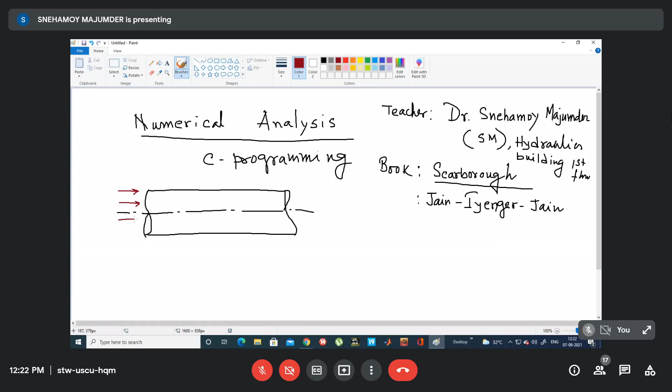Suppose this is the pipe, and this is the axis. We want to know what is the velocity at different points when a fluid, the red one shows a fluid, approaching to the tube and passing through the tube, and with respect to time it has changes in velocity, pressure and velocity profile.

So what happens, if you analyze it, though it is not something you can understand properly right now, but the things are something like this. These are the core boundary layer. You will be studying this in detail. And after the fully developed condition arises, the flow velocity becomes something like this.

Here you can find the flow velocity becomes something like this. Then it is constant. So here it is parabolic up to this point, and this one is constant. And as we approach, this length decreases and it becomes fully developed.

So this is experimentally verified, which means we will get this velocity profile if we have a probe and make a hole here,

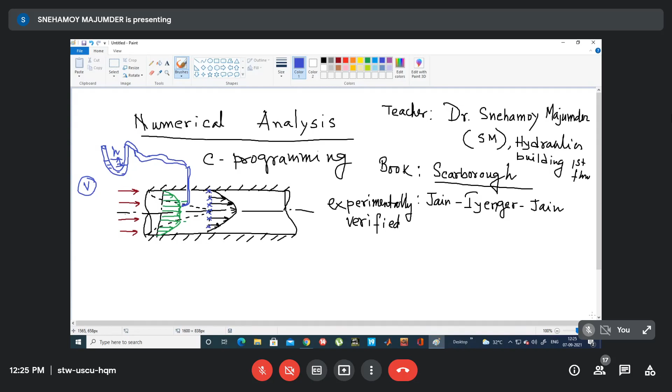Now the question is how we will get this theoretically. So to get that theoretically, we have to solve a few governing equations which dictate the flow of the fluid.

This is the fluid, which dictates the flow of the fluids, and that is the Navier-Stokes equation. You would not be very much conversant now, but don't worry, you will come across all of these things.

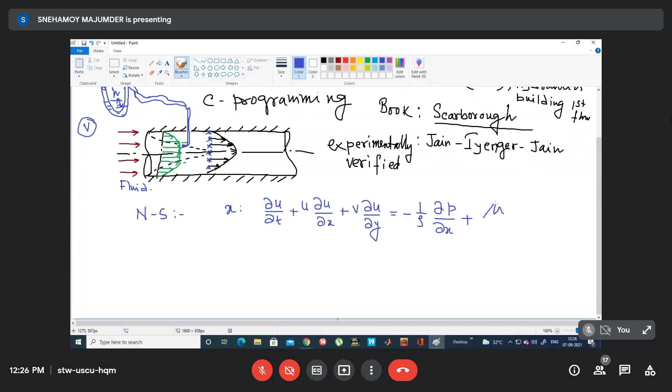Navier-Stokes equation, the x component: del u del t plus u del u del x plus v del u del y equal to, for incompressible flow, minus 1 by rho del p del x plus mu, which is the viscosity, by rho into del square u del x square plus del square u del y square.

Remember, don't worry if you cannot understand, because this is just an introductory class. I am just showing why we should go for numerical analysis.

And the y equation is del v del t plus u del v del x plus v del v del y equal to minus 1 by rho del p del y plus mu by rho del square v del x square plus del square v del y square.

Here we also have the body force gx plus body force gy, but we consider that to be 0 with respect to others, equal to 0.

So that is the governing equation. This is the x component of the governing equation, this is the y component, and obviously this is x direction and this is y direction if it is 2D.

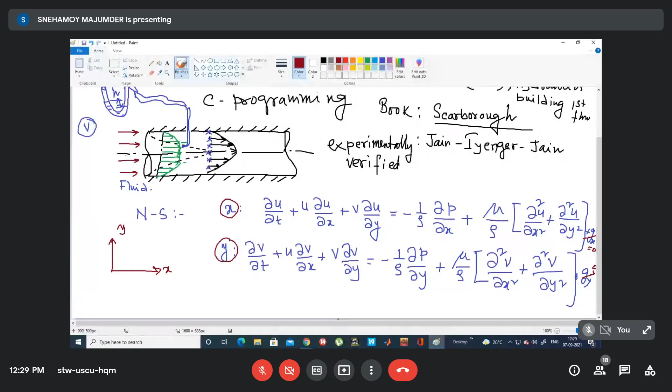The thing is, how can I do this? Let me save this, so how I can do it.

So for example, for this pipe flow, how will I solve it? My domain, that is the geometrical configuration, is this one. As I have already told you, this is my pipe, this is the axis, and here is the flow coming.

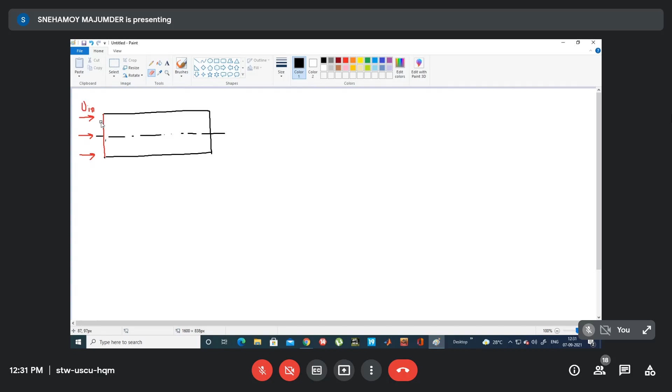So I have U infinity. U infinity means the velocity of the fluid started from a very high distance, coming towards the region where our focus is concentrated. That's why we call it U in or U infinity, since it is coming from a large distance. You may also say U in.

Now see here, this is 1/2. Say this is R, and this is also R.

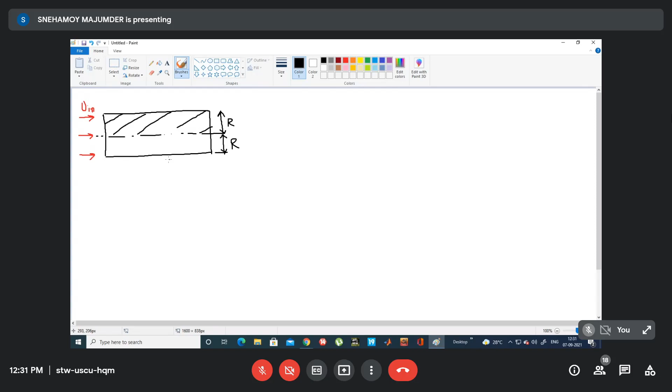So if I find the solution for this region, that is sufficient. I don't need the other one, because the solution here is the same, or is nothing but the mirror image of this one. So if I know the solution here, it is sufficient; I need not solve for the lower one.

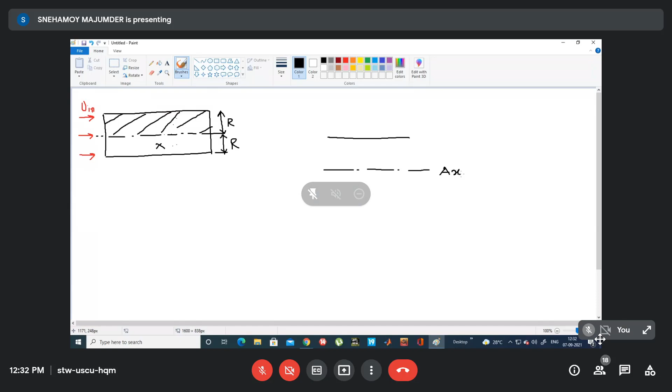So my computation domain will be this one, up to the axis. This is the axis, this is the axis. This is the wall, this is the wall.

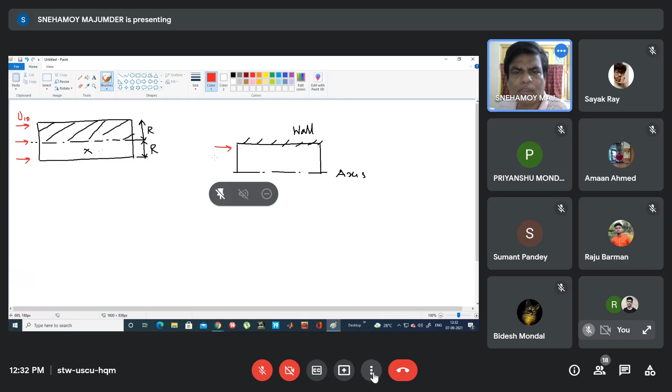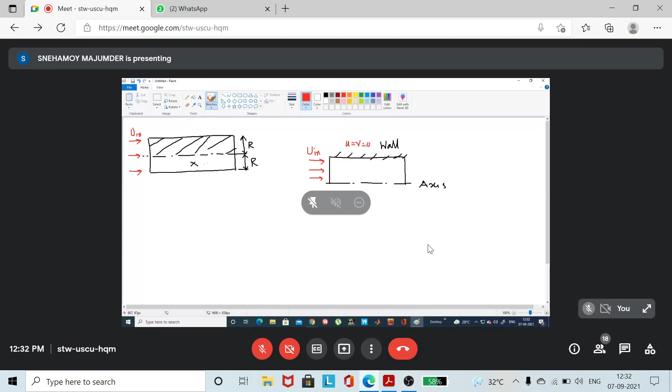So what I will do is solve the problem with the velocity U in, the inlet velocity, and here is the wall. The boundary condition at the wall is U equal to V equal to 0, which is called the no slip boundary condition.

You will come across in fluid mechanics that this no slip boundary condition, and here at the axis.

Neumann boundary condition is, let me say this is R direction, this is X direction. So del U del R of anything, say U, V, etc., equal to 0, which is the Neumann boundary condition.

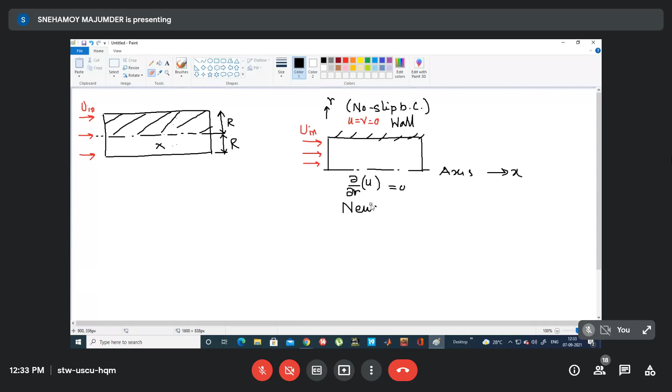This boundary condition is sometimes also called zero shear stress, and this is the fully developed boundary condition. So along the x-axis, nothing will be changing.

So you know all this, and when you know all this, then you can solve it.

How? Then you have to make a grid system. Make it a grid, just like graph paper.

Okay? Are you hearing me, guys? Yes, sir. Yes, sir. Yes.

Okay, make the grid. So in this direction, it is I, along this direction it is I. Grid identification, it is J. So in this way, this one is 1, 1.

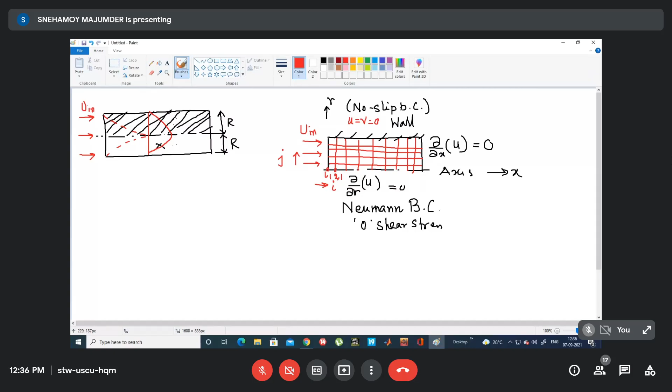And since I have drawn after this a velocity profile, something like this - in the first diagram I showed the velocity is totally fully developed. Fully developed means if you consider the velocity is 10 meter per second here, also 10 meter per second here, and here, which means after this length, this is called the entry length, or entrance length. It will be studied in your fluid mechanics - maybe I will teach you that entrance length, where the velocity becomes fully developed.

Then this velocity profile will be carried forward with no change. So this means del U del x, along any line, U or whatever may be, is 0. So this velocity here will be the same along this line - this velocity here, here, and here will all be the same. So del U del x at any radial position along the axis is 0, and that is called the fully developed boundary condition.

Remember, this is very much required. A lot of you will go to the USA, go to IIT to study - you have to consider this fully developed boundary condition. And along the axis, the normal derivative of anything is 0, which is called the Neumann boundary condition.

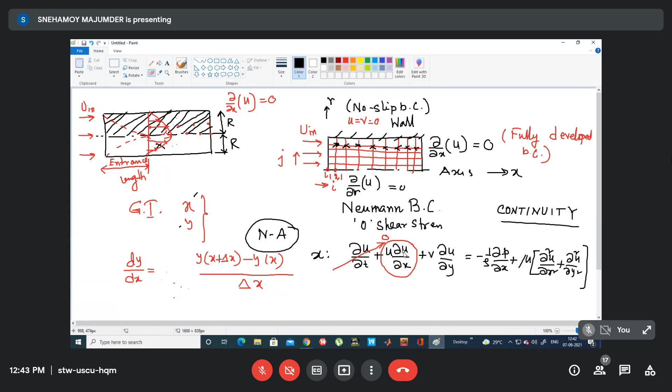We are not going infinitesimally small, and therefore we will not get it exactly. So we will place here at this point, we will apply here, meaning u(i+1,j) minus u(i,j) divided by delta x into u(i,j). What is i,j? Any point. This one is i,j, this one is i,j, this one is i+1,j, this one is i-1,j, this one is i,j+1, this one is i,j-1.

Can you understand this? My indices here is i,j. So this one is i+1,j. This one is i-1,j. This one is i,j+1. This one is i,j-1. Therefore, in this way, I will write. I'll write this also the same way.

So actually, what I am getting for the governing equation, I am taking involved this point, I am taking involved this point, I am taking involved this point, along with the present point. Let me once again save this slide.

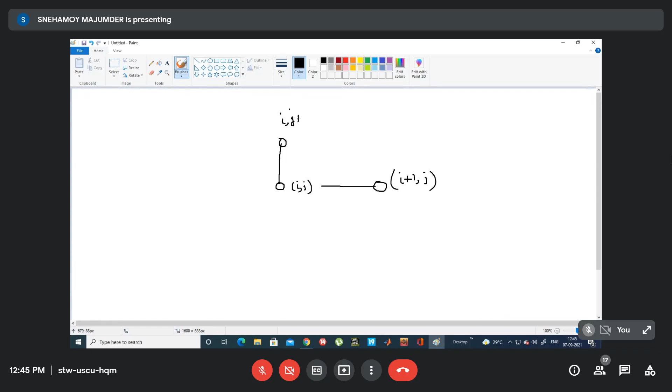That's it, okay. So this one is i,j+1. This one is, I am just making the space exaggerated and showing you i,j-1, and this one is my i+1, j point.

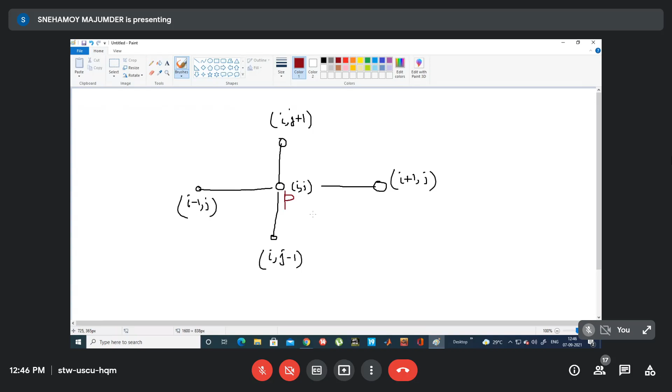Is it clear to everybody? Yes sir, yes sir, yes sir. Numerically, what we say, we call this the present point P. That is, I am here and I am solving this point. So I am here. This is called the east point, my east point. This is called my west point. This is called my north point. This is called my south point.

So if you can see, if you see here... N2. Okay, cancel, let me do it. Save as N3. Save.

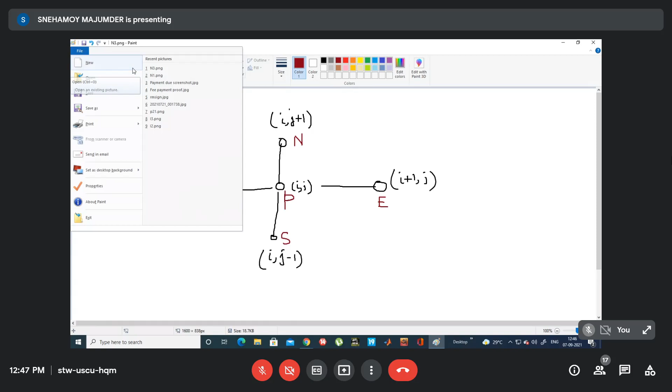If I can go to N2, take a look here. I am at this point. So this is my P point. This is my east point. This is my west point. This is my north point. This is my south point, and this is my governing equation, which I am actually discretizing, or the numerical analysis is being done.

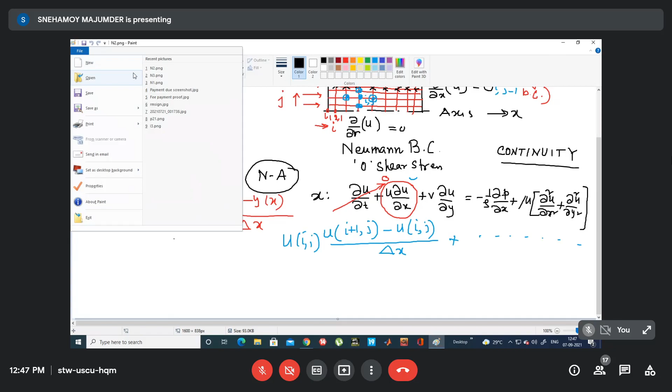i+1, i-1, i,j+1, etc. So in this equation, where I am discretizing, I am only considering this P point, E point, W point, N point, S point. And remember...

Here in N2, in this equation, for example, i+1,j has a coefficient. What is the coefficient from this sector? The coefficient is u(i,j) by delta x. So u(i+1,j) has a coefficient u(i,j) by delta x.

Similarly, if I have del u del y here, it will be u(i,j+1) has a coefficient v(i,j) by delta y. So what is delta y? This is my delta x for the uniform spacing. This is my delta y. So if I write down the equation, then I will be coming to this equation.

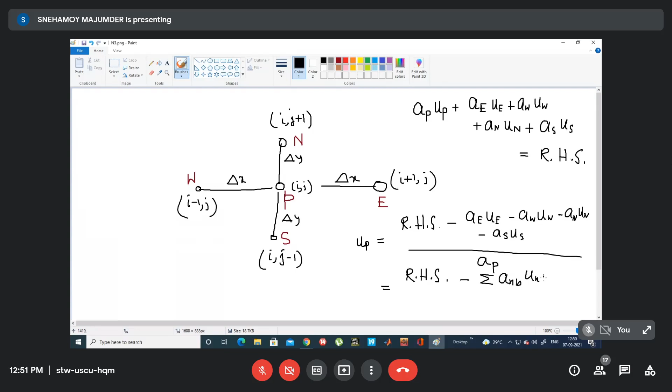Yes sir. So from here, what I can do, if I want to solve UP, I have RHS minus AE UE minus AW UW, AN UN minus AS US, divided by AP. Or it is equal to RHS minus ANB UNB divided by AP. What does it mean? ANB is the neighboring points coefficient. This is my present point, and these are my neighboring points. So my neighboring point coefficients multiplied by the value of the neighboring point velocity, divided by AP, will give me UP.

Do you have any question here?

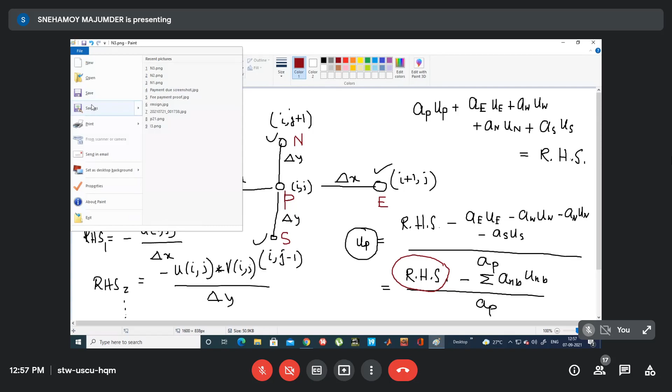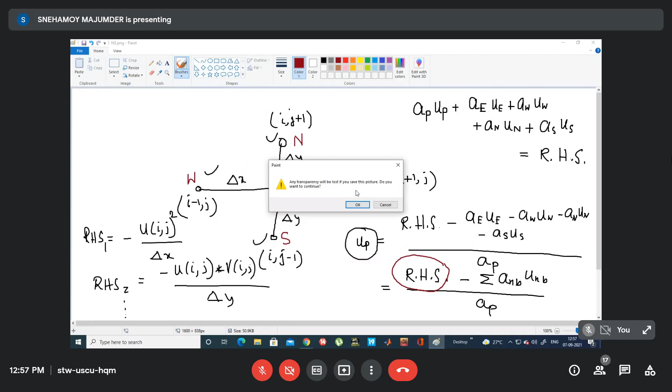Any transparency will be lost if you save this picture. Okay.

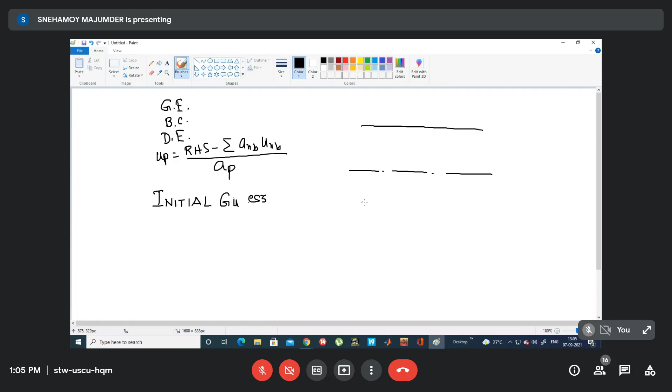This is the domain. What I have done is discretize the domain - this is discretization of the domain, and I am doing that discretization, say something like this.

The more grid points you take, the more it will represent the domain, but the more CPU time will be required.

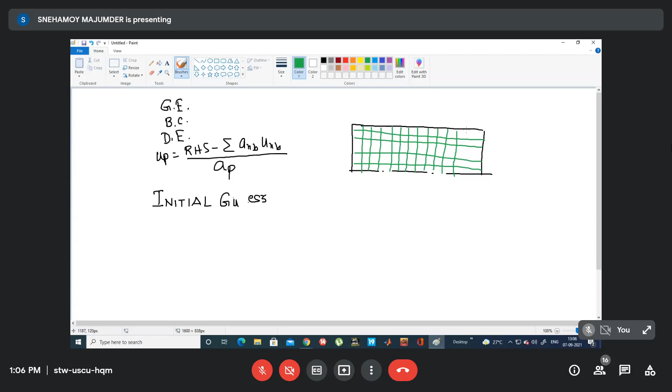So what happens - for all the points initially I will guess the value, say UIJ, or simply let's do it in C.

UIJ - you are taking those values here. Now in the computer, your array, the U array is say 121 by 51 - this is how you declared the array before.

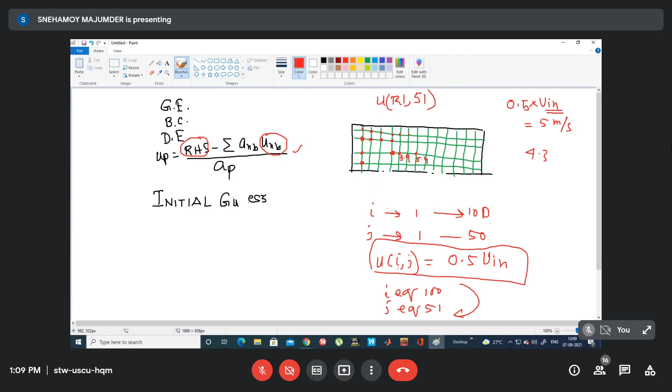But in the next iteration, it is not the guess value - it is the solution, the first iteration solution that will enter here, and you will go on solving the velocity at all points.

So what happens - after each iteration, you find, say, guess value is U-old-ij minus U-ij, present value. If it is less than or equal to any pre-assigned value, say 10 to the power minus 16 or something like this, then you say okay, my solution has converged. The solution I have got is the theoretical or numerical solution of that flow.

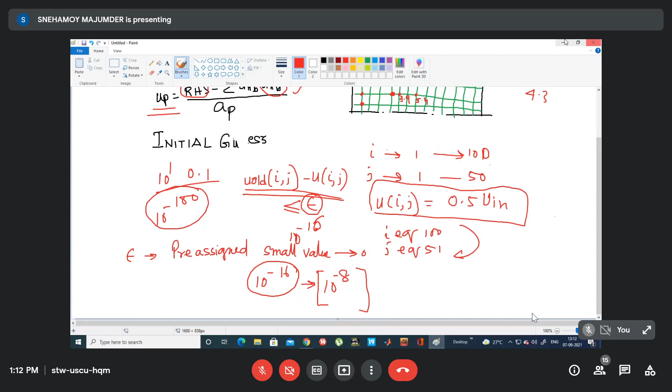The values are being checked, and if it is not converged, obviously in 1 or 2 iterations it would not converge. So then the computer programming is once again directed from the very beginning, because now the guess value has been replaced by the solution values, and once again repeat everything from the first point.

And in the second iteration, once again check whether the old value - now in the second iteration you have to once again put the present U-ij into U-old-ij, because when you go on, U-ij will be updated. So once again, say for example, this point has 4.3.

You make it u old ij equal to 4.3. Now the next iteration uij will be something else. So you have to find the difference between 4.3 and the new calculation, and find which point has the maximum difference, and take that as the deciding factor to check against a pre-assigned small number.

If it is less than that number, the program has converged and you have successfully done the numerical analysis of the pipe flow. This could be a heat transfer problem, a strength of materials problem, an atomic structure problem, or even gene engineering—whatever it is, you solve it in this way and go on solving it using this method.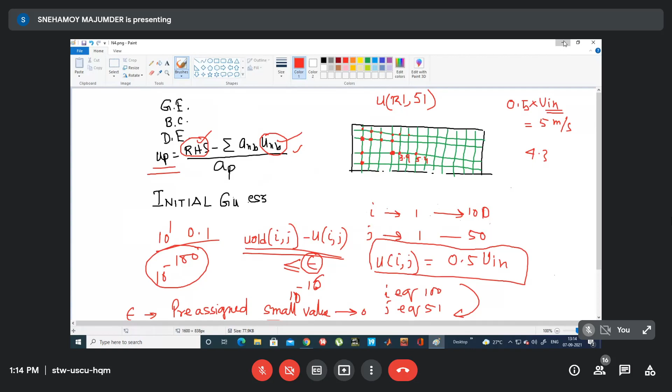You got my point? Yes sir. So what happens in this way? We have hello, bolo. Anybody talking anything?

Okay, so in this way we'll be solving the problems. To do so, we have to select a numerical methodology. The person who told me that uij square is there, sir, we can take it into AP.